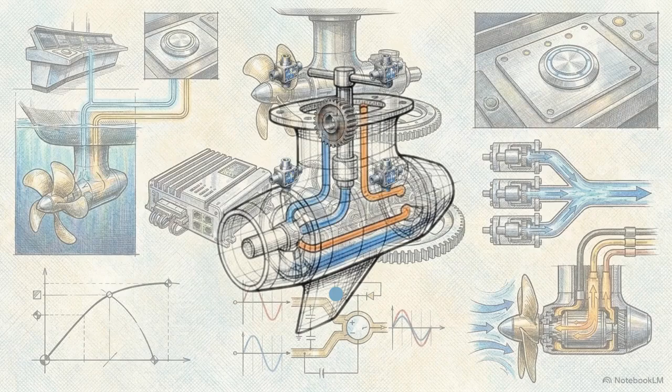Three mode buttons on a modern bridge control panel, AZ-Man, Cruise, and Fast Steering, dictate how an Azipod behaves in the water. For the deck officer, steering is a push-button command. For the marine automation engineer, that same command triggers a cascade of intertwined hydraulic limits, nested feedback loops, and bidirectional power flows happening below deck.

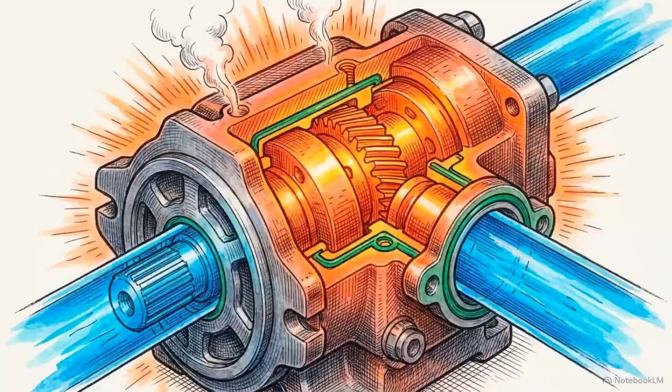To safely commission and maintain these systems, we need to decode the electronic and hydraulic logic behind three specific operational states: fast steering gear mode, open and closed loop control, and the reverse power condition.

Treating an Azipod like a traditional mechanical rudder, assuming a steering command is just a simple mechanical linkage, leads directly to nuisance trips, system faults, and compromised vessel handling. Reliable operation requires looking past the user interface to understand the governing logic that dictates the machinery's response to those commands.

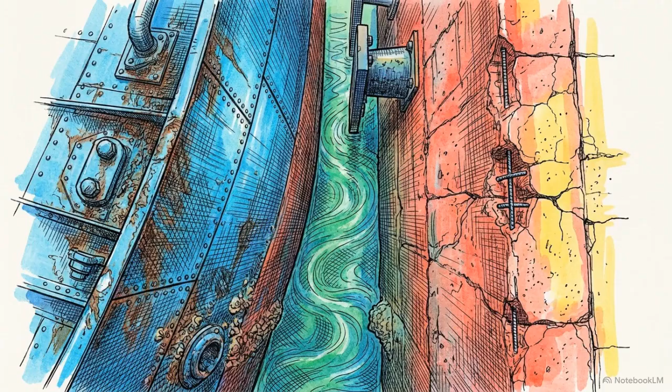During near-alongside maneuvering, a bridge officer might engage fast steering gear mode. This is a sustained hydraulic configuration designed to increase rotational agility in tight spaces.

The baseline steering gear uses high-pressure, closed-circuit hydraulics. Up to six marine-approved hydraulic winch motors drive evolvent pinions, which engage a large slewing wheel to rotate the entire pod. When fast mode is selected, the system routes hydraulic flow to combine the outputs of multiple pumps in parallel.

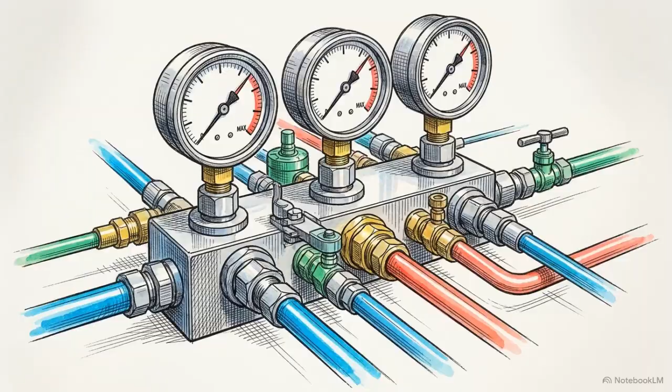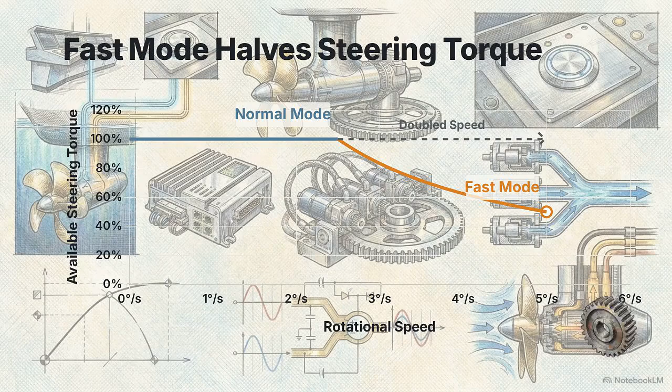But on the y-axis, this comes at the direct expense of available hydraulic torque. The physical consequence is straightforward: the pod rotates much faster to execute sharp maneuvers, but the hydraulic oil loses its mechanical ability to resist external shock loads from the sea.

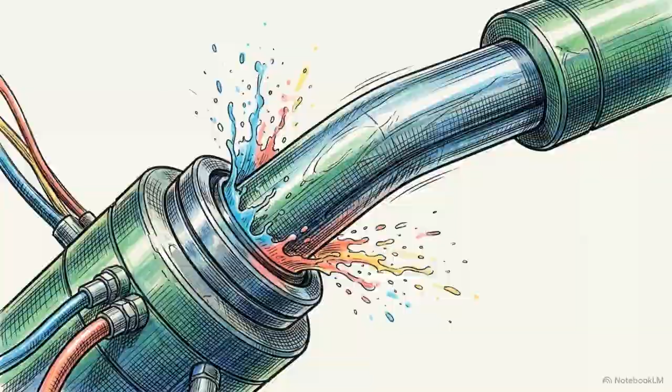In a sheltered port environment where wave action is minimal, the sea exerts little transient force on the propeller. The loss of holding torque is an acceptable operational trade-off here.

Offshore, in open sea transit, waves constantly hammer the propeller. The system requires maximum hydraulic torque to hold the pod steady against those impacts, meaning fast mode must be disabled. Faster rotation is a deliberate mechanical compromise, exchanging resilience for speed.

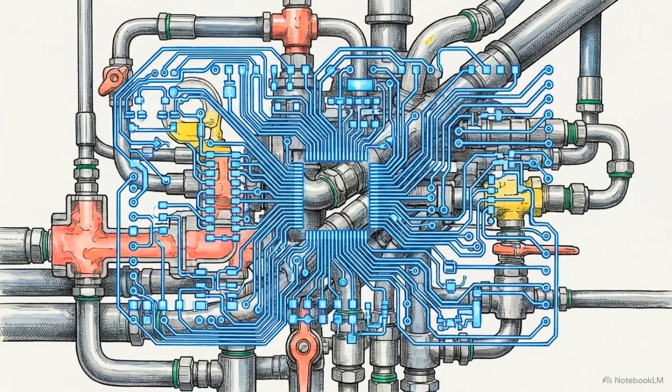Below the physical hydraulics lies the electronic control layer. The bridge commands the steering gear using one of two distinct philosophies. Non-follow-up, or NFU, is a strictly open-loop directional command. Proportional valves open and remain open exactly as long as the operator holds the button down.

Follow-up, or FU, is a closed-loop system based on absolute targeting. The operator dials in a specific numeric angle, say 20 degrees port, and the automation handles the transit to that value. That absolute target is processed by the EMRI ASU 36X servo unit.

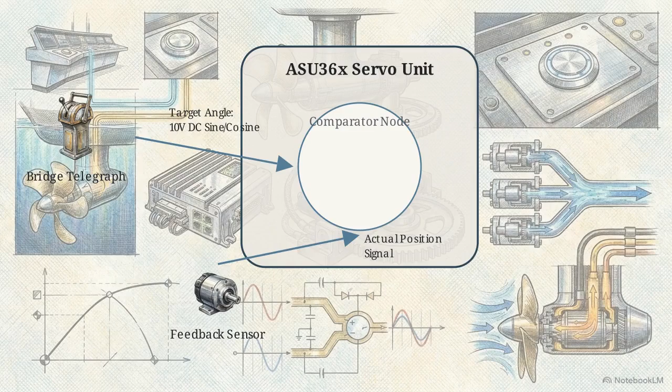The bridge telegraph outputs the target angle as a 10-volt DC sine and cosine pair to a comparator node inside the ASU 36X servo. To determine physical reality, a feedback sensor on the pod sends its own actual position signal back into that same node.

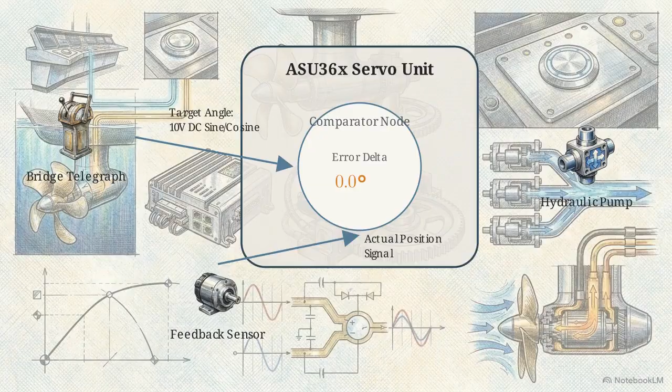The servo calculates an error delta, the exact difference between target and actual signals, generating a command that ramps up the pump stroke. As actual position approaches the target, the delta shrinks to zero, dynamically ramping down the stroke to stop hydraulic flow. This automatic ramp down is an essential safety feature.

It bleeds off the rotational momentum of the pod before it can overshoot. The closed-loop architecture also provides a failsafe.

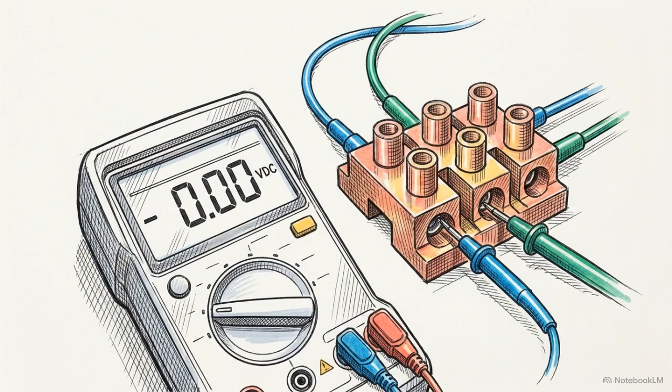If the target signal from the autopilot is lost entirely, the sine channel drops to 0 volts. The system interprets this not as a command to hold position, but as an instruction to return the pod to midships. Once the error delta hits zero, the submerged AZ-Pod locks into the exact angle commanded by the bridge.

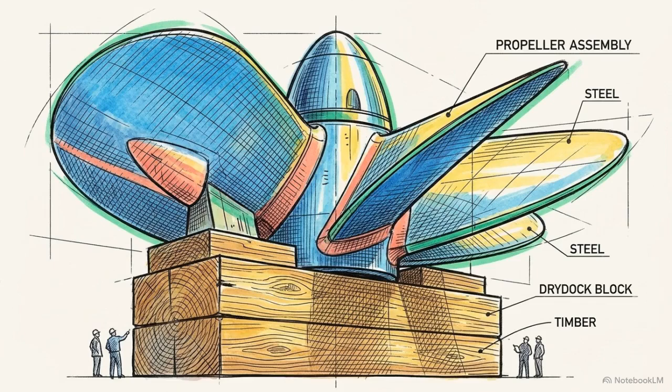Follow-up control delegates responsibility for the pod's physical deceleration and exact placement to the ASU 36X servo. The principles of inertia and control apply equally to the main propulsion motor and its interaction with the vessel's physical momentum. During rapid deceleration, the system can enter a state known as reverse power.

This occurs when the ship's forward kinetic inertia carries it through the water faster than the RPM speed commanded to the propeller. The hydrodynamic trigger is simple: the forward speed of the vessel forces water through the propeller disc faster than the blade pitch is driving it.

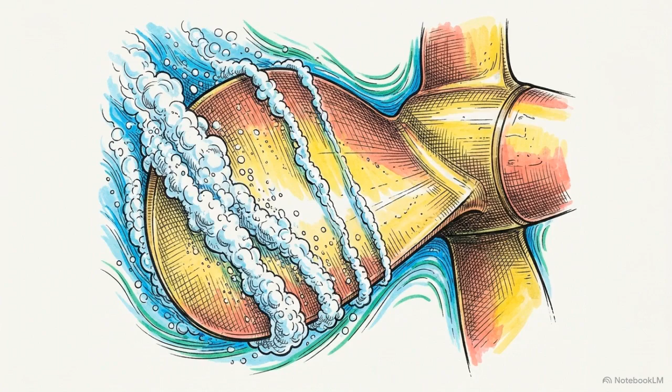The sea physically drags the propeller blades. This external force turns the shaft faster than the motor's internal electrical field is rotating. Fast-moving water pushes against the propeller blades, transferring mechanical torque backwards from the sea into the shaft.

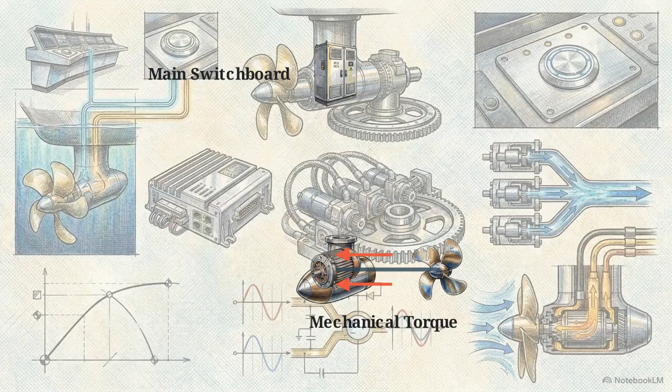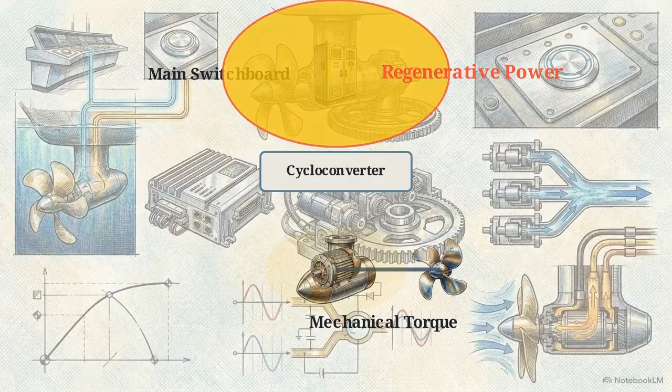That mechanical energy transforms into electricity. Internal electrical vectors reverse direction, flowing upwards from the pod, through the cycloconverter, and back into the ship's main switchboard grid. The synchronous propulsion motor has transitioned into an active generator.

This kinetic to electrical regeneration pumps active power back into a grid that may not have the load capacity to absorb it. To prevent a blackout, the vessel's power management system must immediately throttle the diesel generators to accommodate this sudden surge of regenerative power.

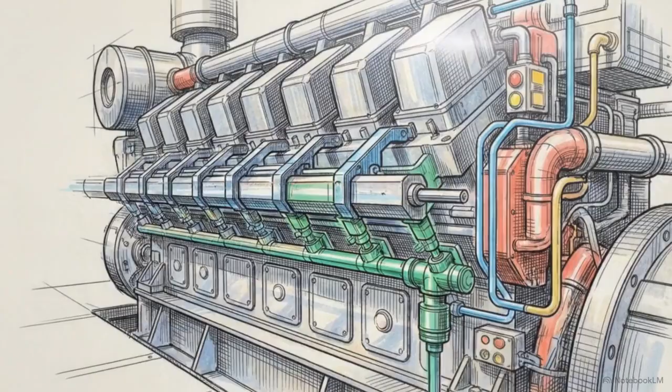The propeller operates as a two-way mechanical interface. Commanding a sudden deceleration turns the vessel's kinetic energy into an electrical grid management problem.

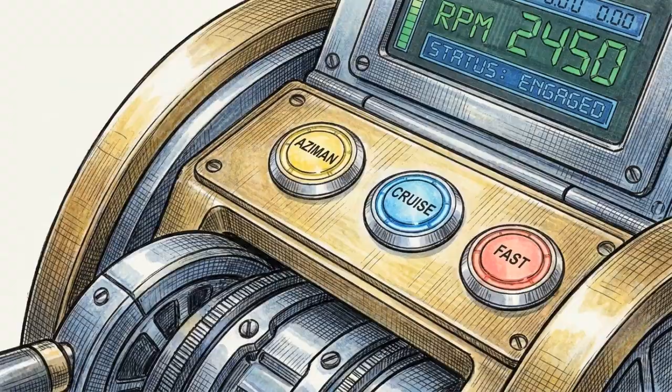The terms used on the bridge, modes, angles, and RPMs, are shorthand for the physical, hydraulic, and electrical trade-offs happening below deck. Fast steering mode sacrifices wave-resisting torque to prioritize maneuverability in port.

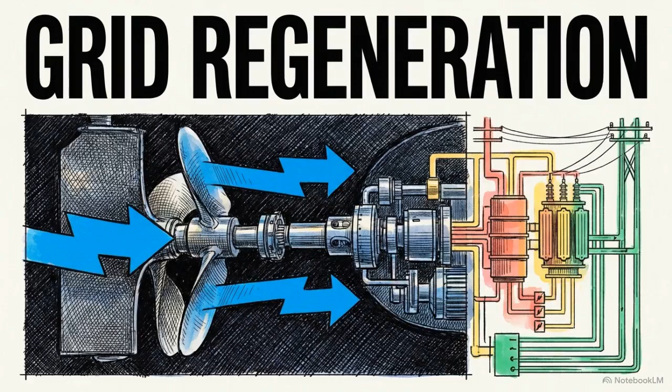Follow-up control relies on precise 10-volt reference loops to mathematically manage multi-ton inertia without destroying the slewing gear. And reverse power converts the ship's momentum into active electrical generation. Understanding these control principles allows an engineer to safely commission, operate, and troubleshoot the hardware propelling the vessel.